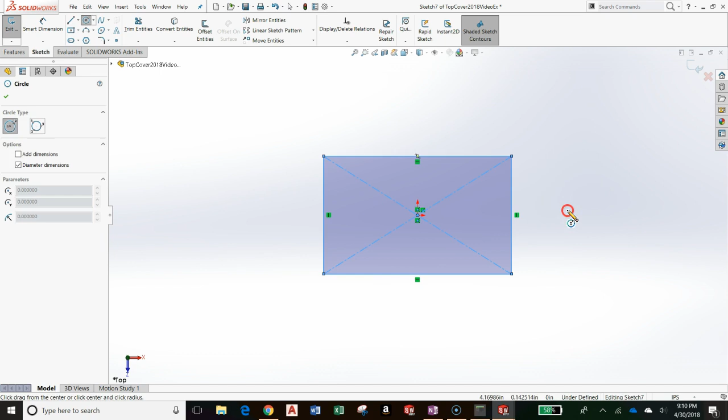So let's get started. The first thing we're going to do is do the top base. So I'll start sketching on the top plane. I'll go for a center rectangle, and it's going to be 4 by 2.625, and I'll show you guys a quick little shortcut. If you hold down your right mouse button and then move up, you have a gesture wheel, which I have line, circle, rectangle, and dimension is what I want. So I'm going to put in 2.625 and then 4. Now extrude this by 0.25.

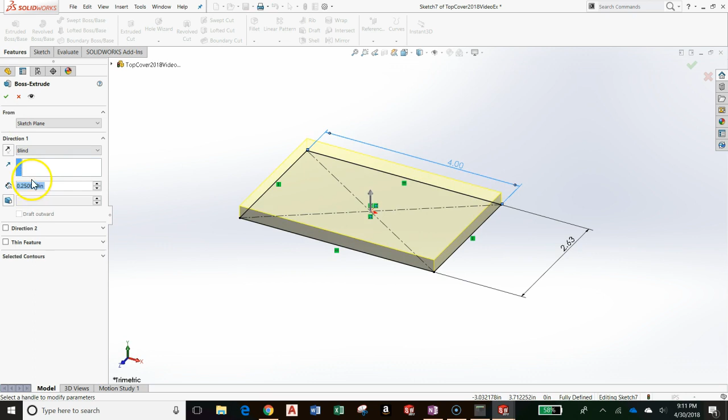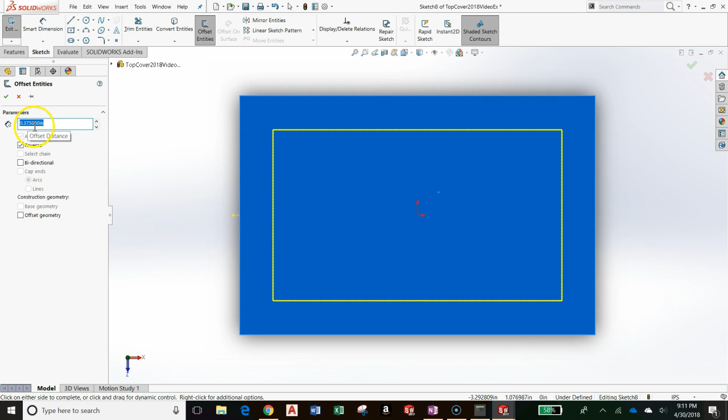Now I'm going to sketch on this top face, and instead of drawing another rectangle, I'm just going to offset these edges here. Now I already have the face selected, so I just need to go up to the Offset Entities button, and then I need to reverse my direction to go inside, so I'll click on Reverse, and I want my distance to be 0.375. So I'll hit the green check mark and then extrude this up 0.25. There we go.

And I also need to sketch on this top face here. I'll sketch on this top face, start a new sketch. So this is my third sketch of my top cover part. And I'm going to draw one circle at the top right. And then just for the sake of introducing it, I'm going to do something called mirror entities. So I'm going to go up to this mirror entities right here in the sketch tab of the command manager.

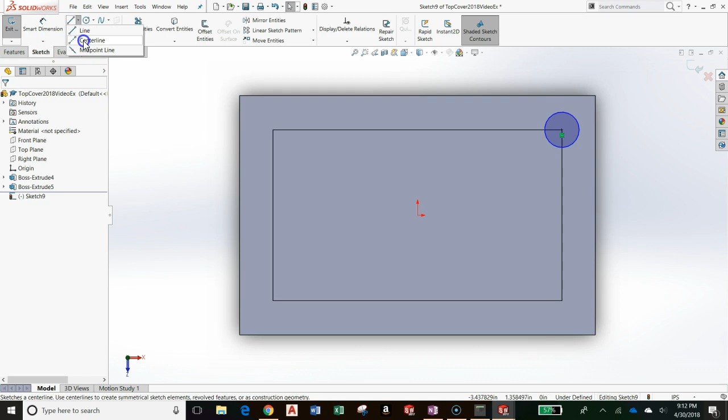I'll click on mirror entities, and I forgot to draw a center line, so I'm going to cancel out of this really quick. Draw center lines from the origin to this top midpoint here, and then from the origin to the right midpoint over here. And I'm double clicking to get out of a line command, and I'll press escape to get out of the whole command altogether. Now I can go up to mirror entities up in the sketch tab of the command manager. So entities to mirror, you can see in my property manager at the left, I'll select my circle, and mirror about, it's going to be this center line first, so I'll confirm that.

And I just realized I forgot to set a diameter dimension on my circle. It should be 0.5. Notice that my circle on the left changed with my circle on the right. That is the advantage of mirror entities. It's kind of like adding a symmetrical relation and an equal relation all in one.

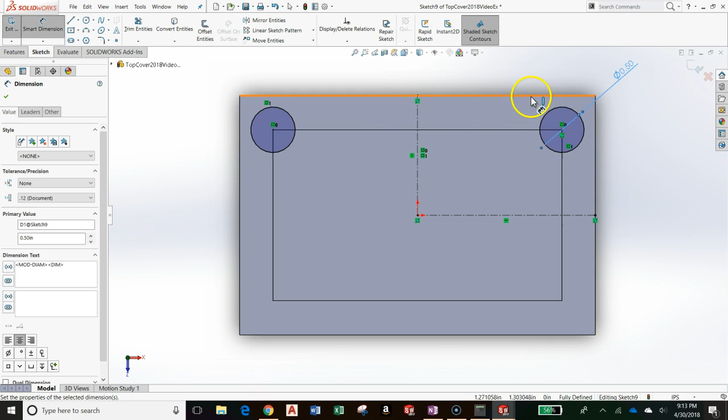I'm going to do mirror entities again, so I'll go up to mirror entities and I'll select these two circles, and then click in the mirror about box. Click on the horizontal center line now. I can see a yellow preview of my entities to be mirrored. Press the green check mark, and I have a fully defined sketch because my circle at the top right is fully defined, therefore the rest of these are going to be fully defined.

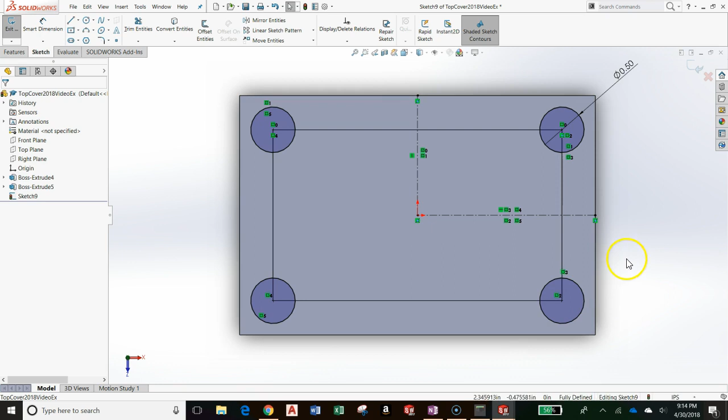And now I will go up to features, do an extruded cut, and I want to do up to surface here. So I'll go to the direction type box, click up to surface, and then click on this surface right here. A little shortcut to show you all is, say you want to do an up to surface, you can double click on the surface that you want to go up to, and your cut extrude property manager automatically changes to up to surface and selects the face that you double clicked on. That's just a free little shortcut tip for you. I'm going to confirm this.

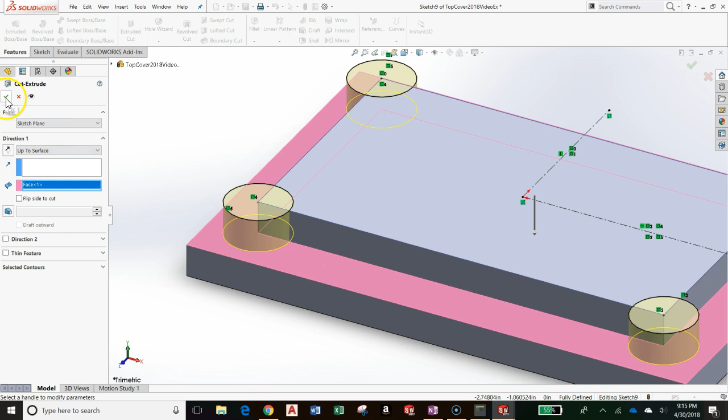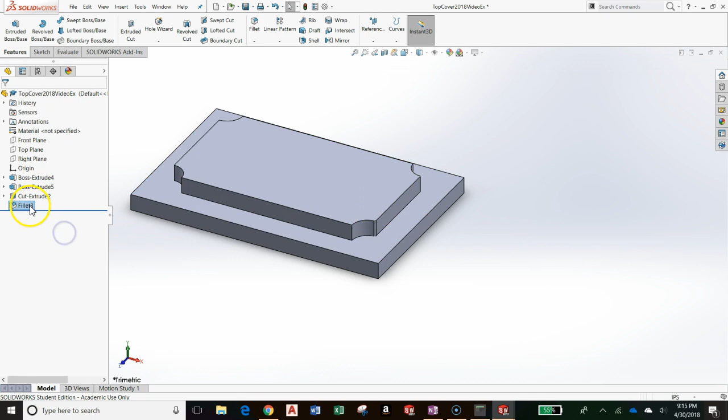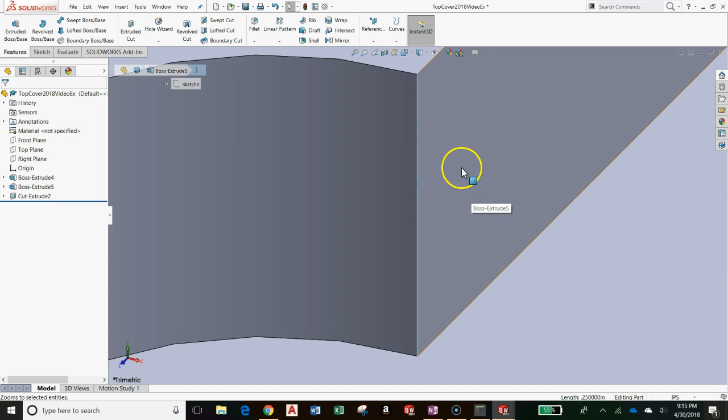And then finally, for the last thing to show you, I'm going to do fillets. So I'm going to go up to fillet. And you know that this is kind of far away, right? So I'm going to click on it. Whoops, sorry about that. I didn't mean to do that. So I'm going to delete this fillet, because what I wanted to do was select this edge first, and then in your context toolbar, and it also shows up if you right click, you see this little magnifying glass here. If I click on that, it's going to zoom all the way up to my selection, which is pretty cool. You might find that useful sometimes. I just wanted to show you that.

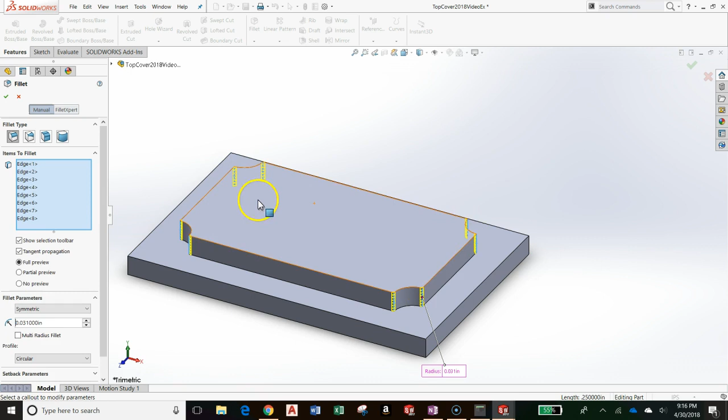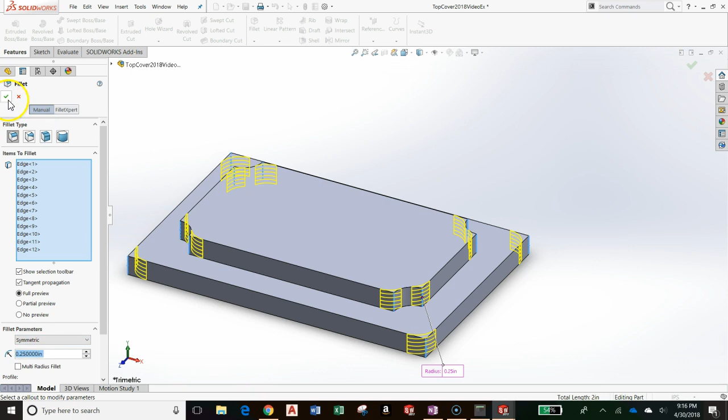So now I'm going to proceed with my fillet, and I'm going to click another edge so that I get my fillet edge quick access toolbar here. And I'm going to click the first one to select the rest of these edges, and then also I'll select just this corner, and then use my option to select the other 4. And the radius that I want is going to be 0.25. There we go. And this is our top cover so far.